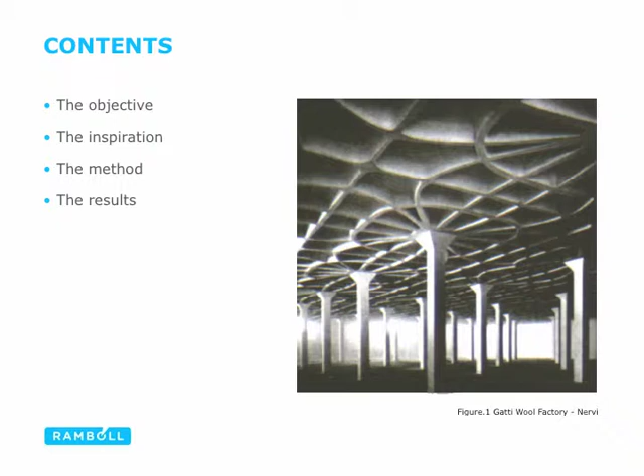Okay, the presentation touches on the objective of this work, the inspiration, the method we use, and finally, obviously, the results. Now, the objective was to design a reinforced concrete floor plate which is more efficient than the benchmark of a flat slab. And ultimately, the aim is to use less reinforcement, less concrete, the embodied carbon will be reduced, and then hopefully this technique could be extended to other types of floor structures, such as timber,

leading to even lower embodied CO2 values. And the graph on the right shows the proportion of embodied energy in office buildings over years as legislation has come in. At the moment, embodied energy is quite a high, or projected to be quite a high proportion of the energy content of the building. So if we can reduce that, we're doing extremely well.

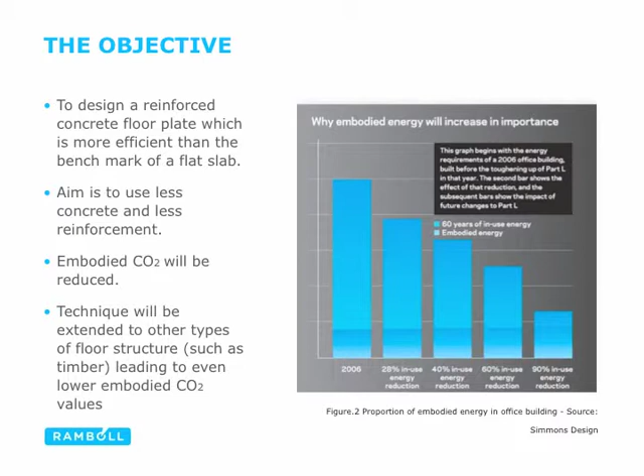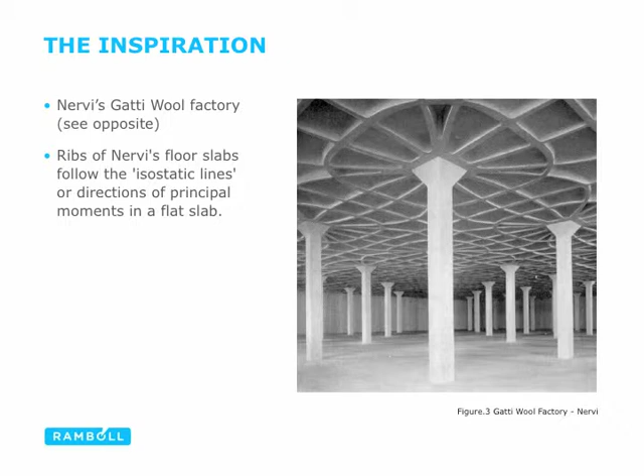The inspiration for this was originally Nervi's Gatti wool factory, which he labelled as floor ribs which follow the isostatic lines or directions of principal moments in a flat slab, which is great, and I think it's along the lines of where we want to get to. We actually want to apply a more rigorous technological approach and see what result we get.

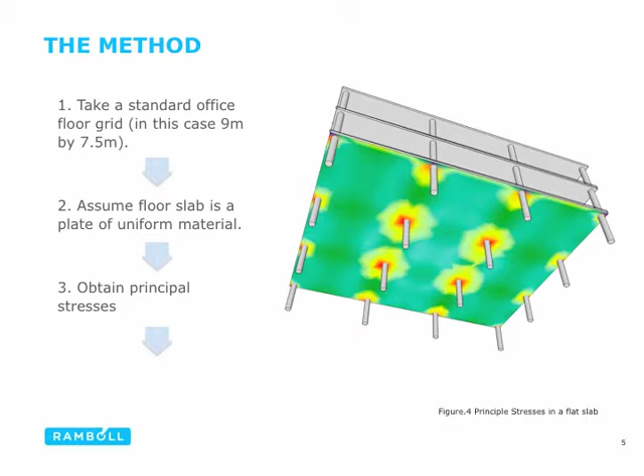So the method is to take a standard office floor grid. In this case, it's 9 by 7.5. Assume the floor slab is a plate of uniform material, and then obtain the principal stresses from our FE analysis. And you can see on the right the principal stresses in the 9 by 7.5 flat slab. And then we go into post-processing of the FE analysis model.

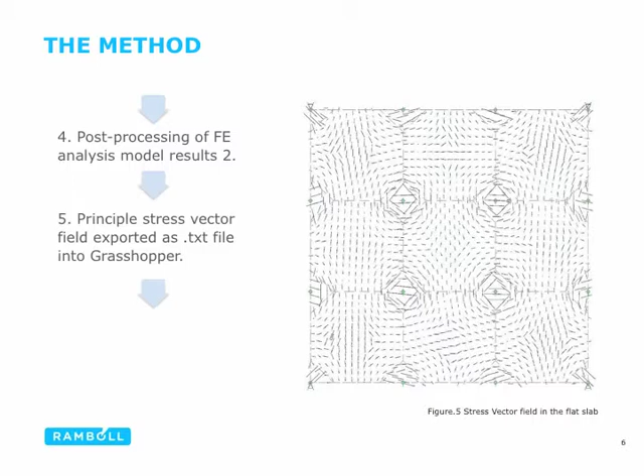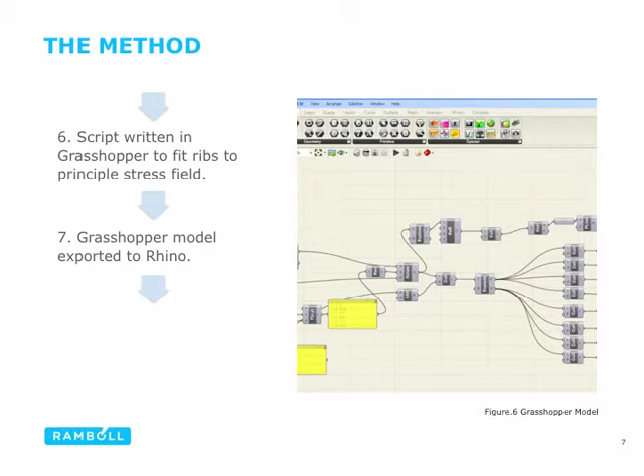Once we've done that, we export the principal stress vector field as a text file into Grasshopper, and the stress vector field in the flat slab is shown on the right. Then, once we've got this into Grasshopper, ribs are fitted to the principal stress field using a script which we've written, which sits within the program. And then once we've done that, the Grasshopper model is then exported into Rhino. So we've got a 3D model to manipulate the geometry.

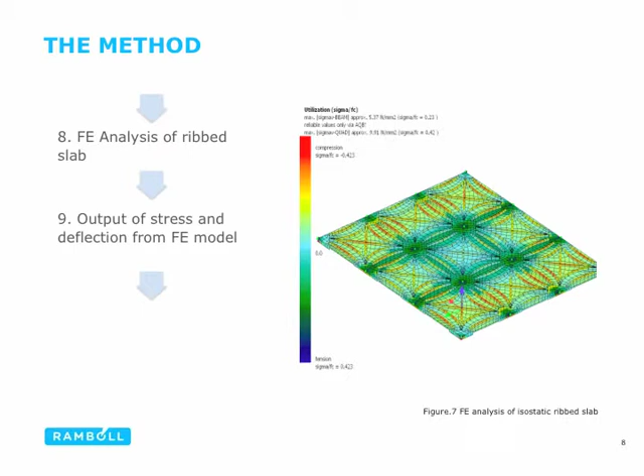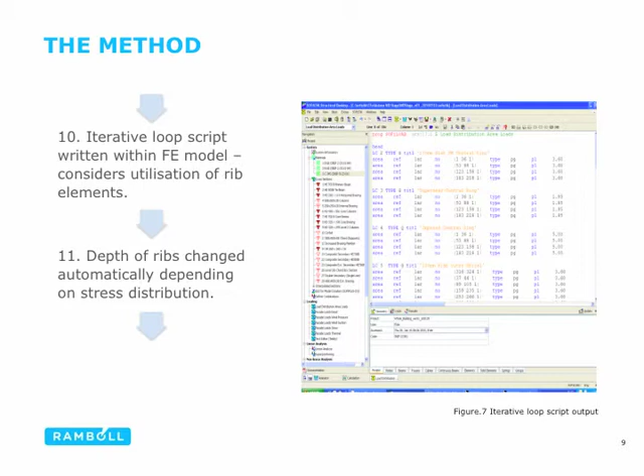That 3D model is then exported into our analysis software. We run another FE analysis, and the results are on the right. The stress and deflections are outputted. And we then have an iterative loop, which we've scripted again within the FE model, which considers the utilization of all the rib elements, and then automatically changes their depth depending on the stress distribution. So it runs over quite a few cycles until it gets to what we think is the optimum distribution of depth throughout the floor plate, which looks as follows on the right.

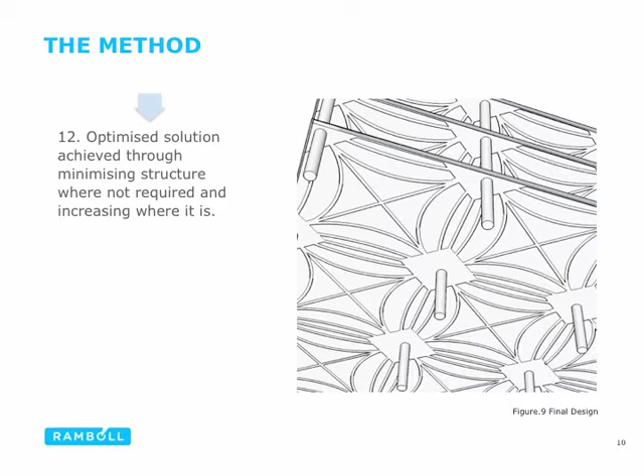The right is a flatter image actually before iteration of the depth of the ribs, but it shows the pattern you get from matching a structure to the vector field. It's pretty similar to that obtained by Nervi. So we think we're very much on the right lines with this. And here's a 3D view.

And the results, well, if you compare a 300 deep flat slab over the grid that we've chosen and the size of floor that we've chosen, this results in a volume of concrete of 182 meters cubed. It's a weight of reinforcement of just over 6,000 kilograms. And if you compare that to the new solution, we end up with a slightly deeper structure, 350 mil deep ribs, but they're quite narrow, and the slab is fairly shallow as well.

But the volume of concrete is hugely reduced compared to just a uniform flat slab. In this case, it's 120 meters cubed of concrete. So something like a 33% reduction in concrete. The weight of reinforcement is marginally reduced, but pretty much the same. But the important thing here is to say, okay, well, 33% of concrete saved is actually equivalent to just over 0.2 tons per meter squared of embodied CO2. So that in itself is a very positive result.

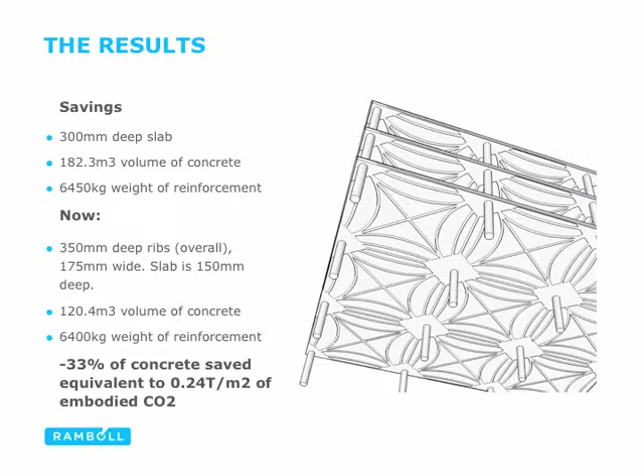And that's it. And hopefully there'll be more. As I said, we're going to extend this into timber frame construction and maybe other forms of concrete structure.